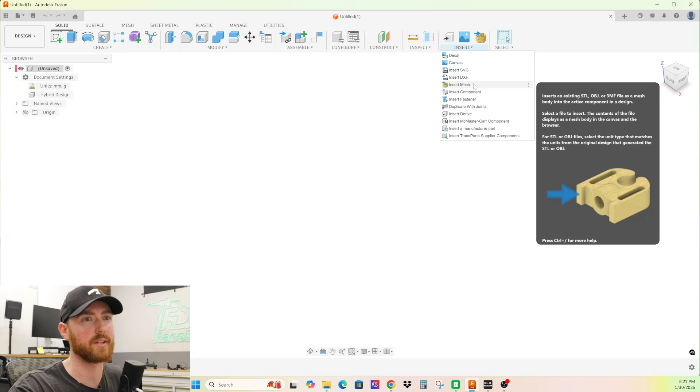The next thing I'm going to do is go to insert mesh. I'm going to find the mesh file in my computer. This particular part is a front steering knuckle. I'm going to convert the mesh body into a component. It's the first thing that I do.

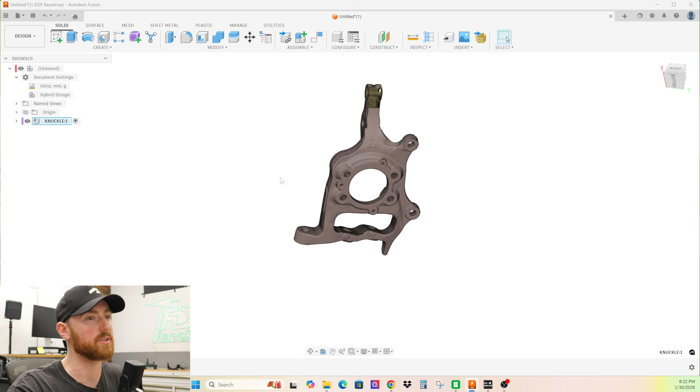From here, I'm going to go within that mesh file, which is now a component, and I'm going to start modeling and working on this from within there. I'll show you why that's relevant later.

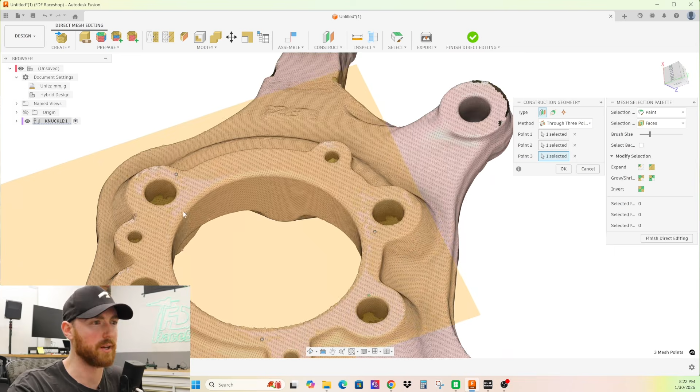The next thing I'm going to do is go to Mesh, Direct Edit, select the body, and use a 3-point plane and pick 3 average points on what I deem to be the flattest surface of the part. You can kind of see how it's crossing over the mesh and how it interferes. From here, I have a plane that is a decent average.

If you're unhappy with it, you can just delete that and try the plane again. We're going to go ahead and use this. Finish direct edit. The next thing I'm going to do is an offset plane.

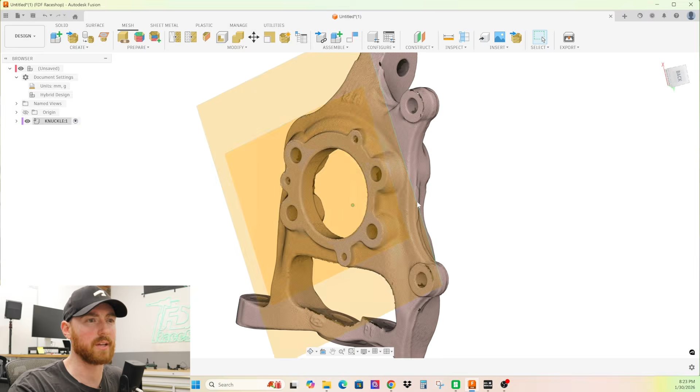We'll set this back 3 millimeters. The reason I'm setting it back 3 millimeters, it's not that critical, but I want it to cross through all of the holes. And I'm just going to hide the first plane that we did so it's not in our way.

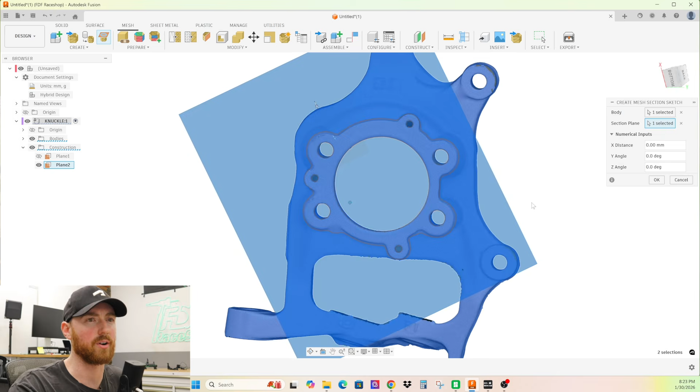I'm then going to do a create mesh section sketch. Select the body, select the plane, and you can see that it's cutting right through all of those holes that we have wanted to capture.

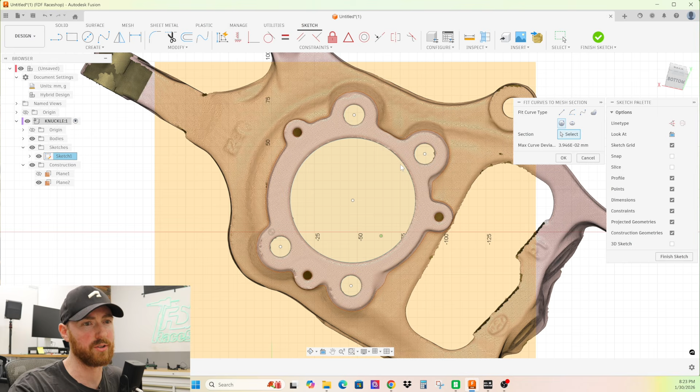The next thing I'm going to do is edit that sketch and then do a fit curve to mesh. This command allows me to fit curves, lines, circles to the section sketch that we did. I'm going to select this circle command because it's going to give me the best average of the circles that I want to use to orient this knuckle.

After I've done that, we can go up in the constraint menu and start making some good decisions on what we should do. We know that these holes are all going to be equal, so I'm going to make these holes equal.

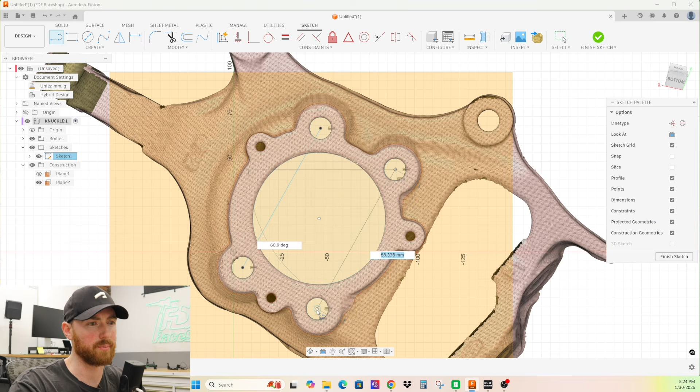The next thing I know is that these, and you can confirm all this by measuring with a caliper or a micrometer if you actually have this knuckle, I'm assuming you do because you would have scanned it. We can use these constraints to our advantage in a way that you actually wouldn't be able to do in a lot of softwares. I can make these circles all the same, plus I can make these lines parallel to each other.

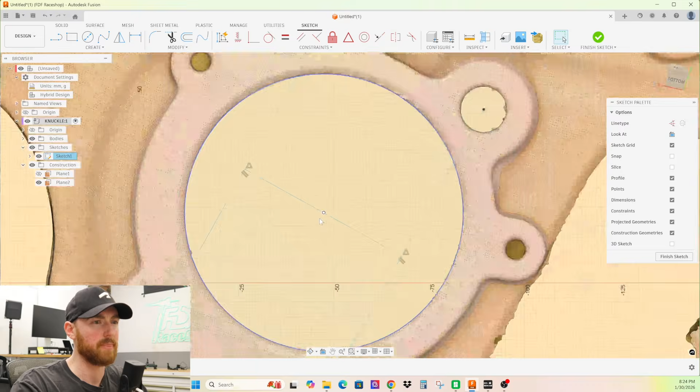I can also do midpoint to midpoint, and then make sure this is very, very slightly off. So if we do want to maintain concentricity with everything, we can simply position that there. Obviously it's going to be ever so slightly off, but mesh section sketches are not absolutely perfect. They're based off the mesh.

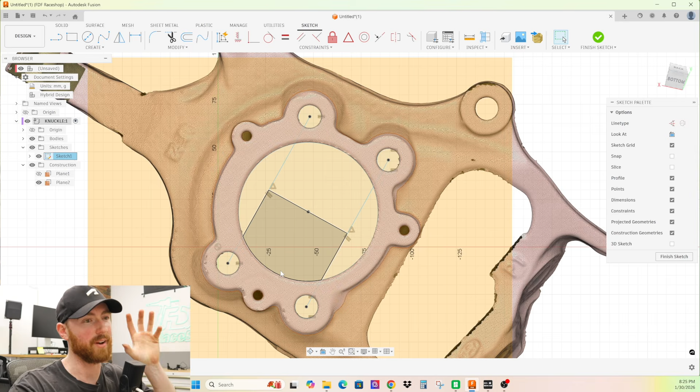So if I do it this way, I know that if I model this knuckle later down the road, these are all going to be parametric.

After I'm satisfied with doing that, as far as the orientation goes, the next thing I would do is simply finish the sketch. Because we drew that sketch within the component, that sketch is now connected to this knuckle.

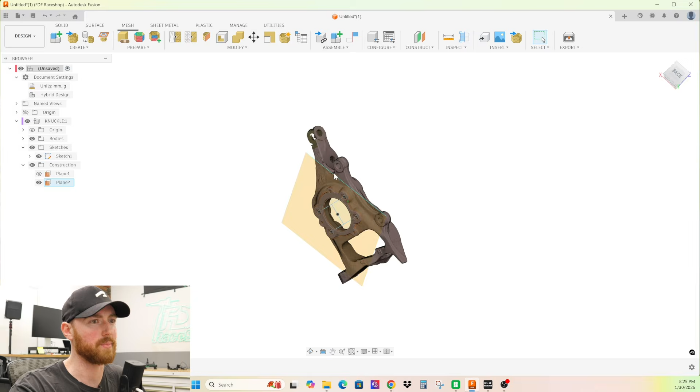So if I go back into this space, and if I unground it, this knuckle is able to be moved, and the sketch is now physically part of this knuckle, which is great for us because we now need to make the origin visible, and we need to get this knuckle over to this origin. Fortunately, using the constraints, we can do that even just based off of the sketch.

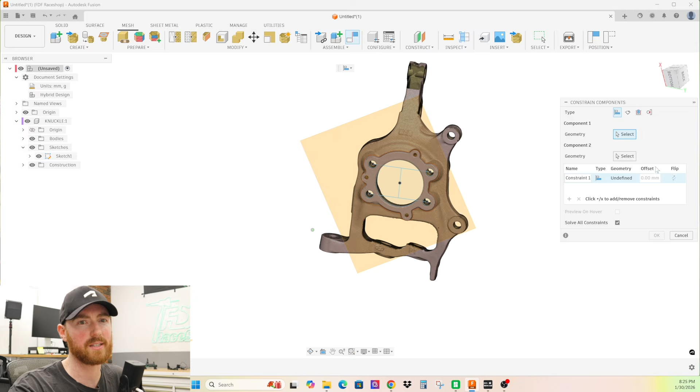So the next thing I'm going to do is very, very simply determine how I want to orient this.

So if I look at my origin, I want my Z going up, I want my X here and my Y there, just like you can see in this corner. And the front of the knuckle here, I want on the front plane. So I can make this plane visible again.

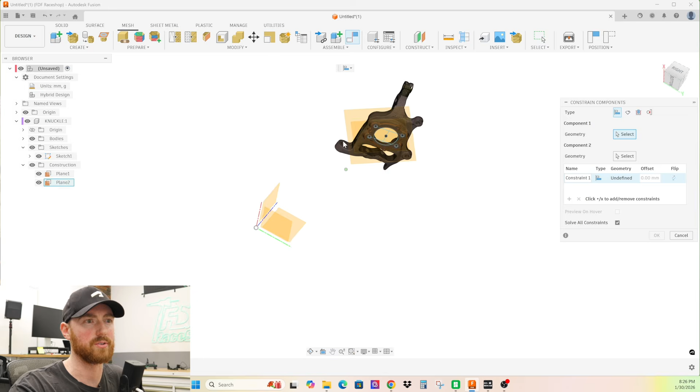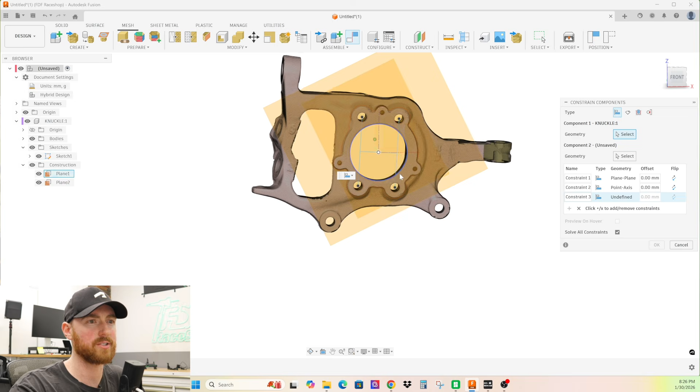I know that's the one I want. I'm going to do a constraint from this plane to this plane. That is backwards, so we can hit this flip command, easy enough. The next thing I'm gonna do is an additional constraint. We'll do the center of our circle on the Y axis. And then our last constraint is gonna be an angular constraint to the X, and I'll just flip that.

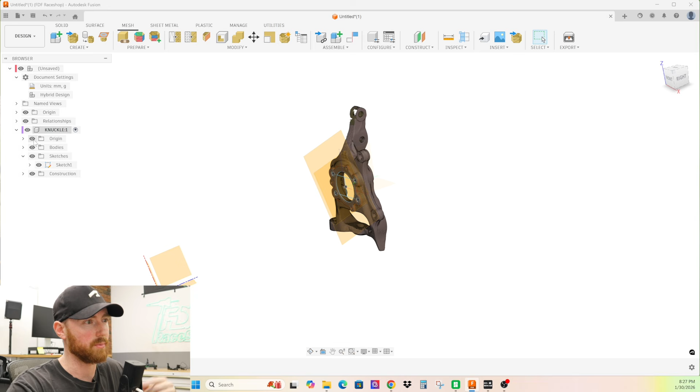And it is as simple as that in regards to getting the knuckle into its origin, but we are definitely not done yet. If we look at the knuckle, because we made a component from the knuckle it has its own origin as well, and that is kind of problematic. You can see where the origin ends up being on the knuckle. Not to worry, we will be cleaning that up later.

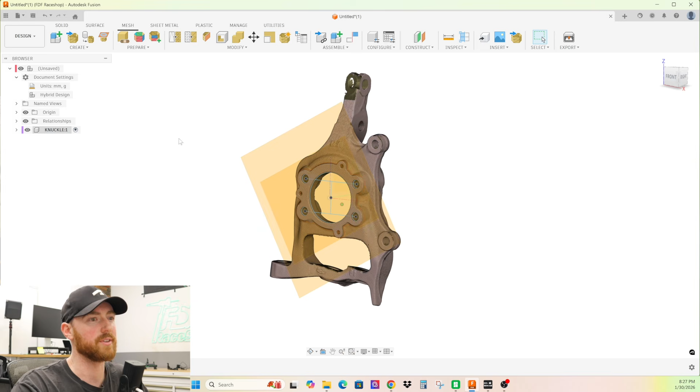I am kind of doing this just as a flow. I don't do this that often, but I do have a very good understanding of the objective. Through multiple different types of approaches, I can always end up in the same result, and you can just follow how I'm doing this and apply it in your own way. There may be a slightly better way to do it, but this has been a really tried and true method, especially when working with different types of files.

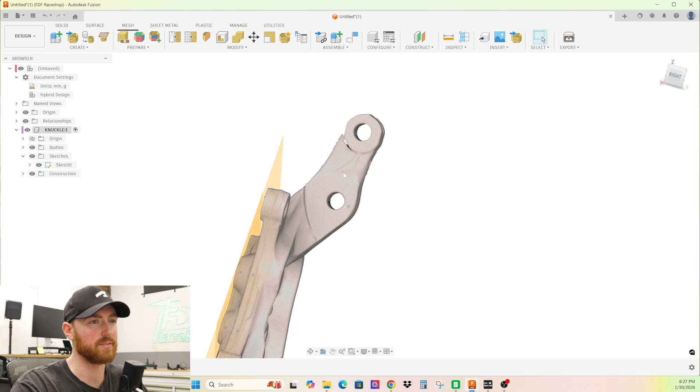The knuckles are not bad, but there are more complex parts out there. The next thing I want to do is capture all the rest of the geometry of this knuckle, but it has to be based off of the very first plane we made. Because if I go ahead and make a 3-point plane here on the side of this, it may be pretty decent, but it will not be perpendicular to this plane. It will not be perfect, that is.

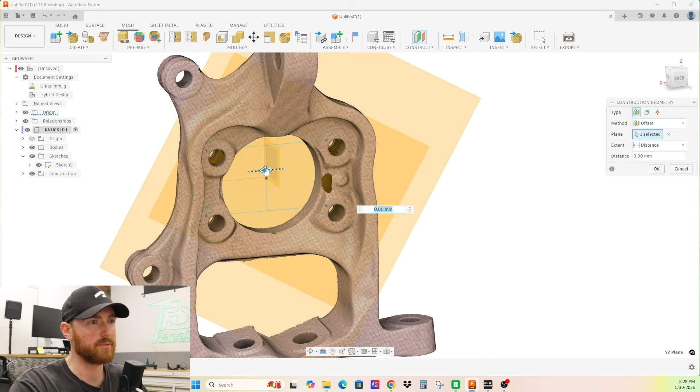So in order to maintain that being perfect, I have to base my mesh section sketches off of the original origin. So the next thing I'm gonna do is create another offset plane, make sure I'm in the knuckle, and I'm gonna make it right off the middle. Let's go over like 10 millimeters, it should cut right through. And I actually wanna stay close to the side just because the scanner doesn't get into the middle of the holes, but it does get on the edges pretty well.

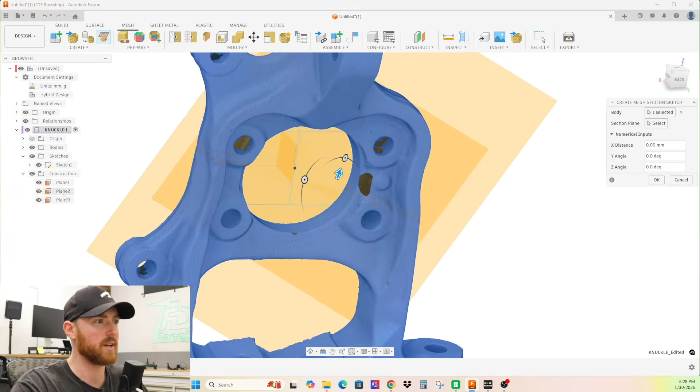So I'm gonna do another mesh section sketch, this mesh, and then the plane I want - it's trying to select other plane, this plane. So you can see how this plane is cutting through the holes that we need to select, and it is exactly perpendicular to the original. So we can do the exact same thing: go into our sketch, edit the sketch, fit curve to mesh, select the circle, and I can now add these circles and do the exact same thing.

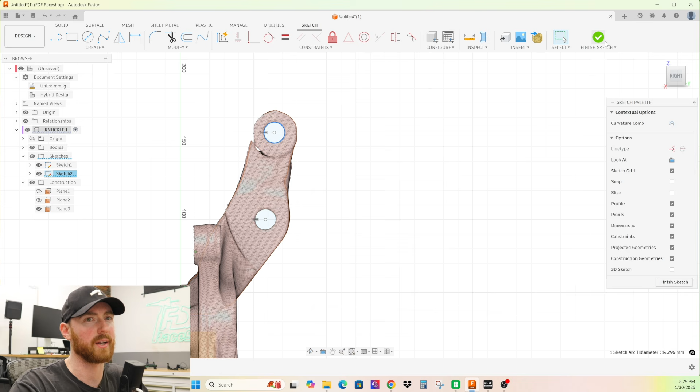We'll make them equal. And if you have your calipers or micrometer on you, you could actually go in here and dimension these. I do know that that's pretty accurate. 14.3 is what I captured, so 14.296 is probably exactly what it is. And we're gonna leave those there for now.

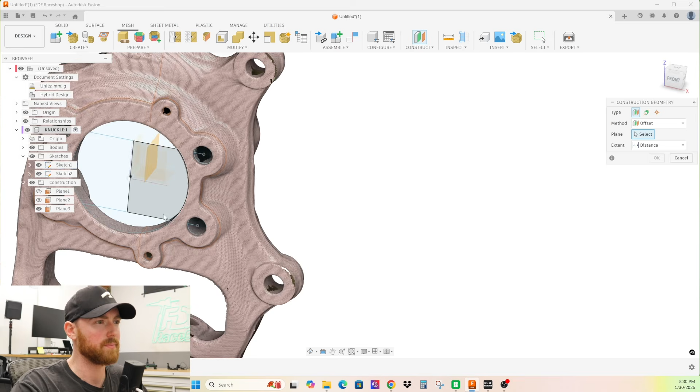So we have these 4 holes, the center bearing, we have the 2 sides. We need to capture the brake calipers. And don't worry about all these planes that we keep adding, it's really not gonna be that big of a deal. So I'm gonna do the same thing, an offset plane from - it doesn't really matter, it could be the face, it could be from whatever, as long as it's the same. And we need to now cut through the brake calipers.

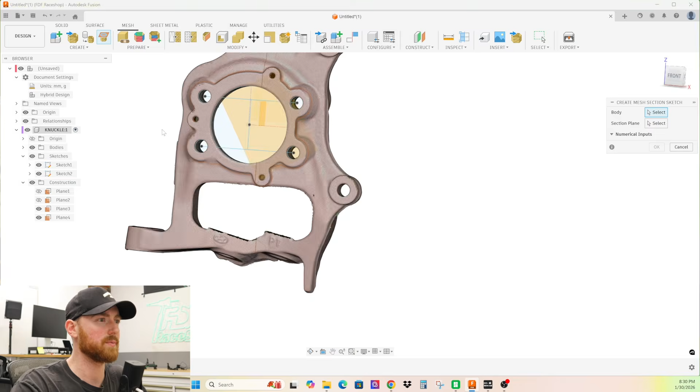It's a little hard to see, but 10 millimeters back should cut through these 2 holes here. We're gonna do the exact same thing: mesh section sketch, select the body, select the plane, and you can see we are cutting through the brake caliper mounts. So I'm going to do the same thing, edit that sketch, fit curve to mesh, circle, select those brake caliper ears. Perfect. And then the next thing I'm going to do is also make those equal as well, because I know that they are.

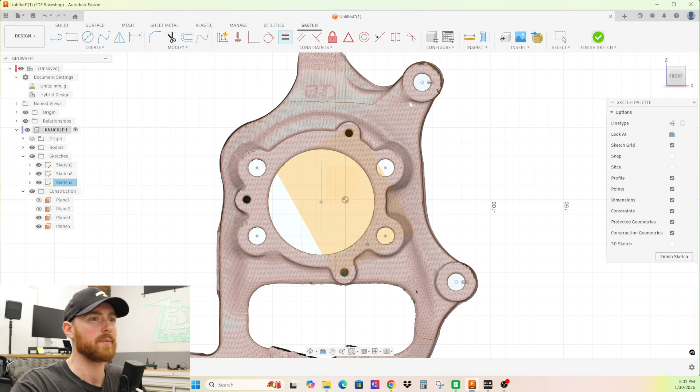Once I've confirmed that, I basically have the majority of the geometry I need, at least the stuff that I know is perpendicular. There are a couple stragglers over here. You can see these, these are all tapered holes, these are cones. To do these, you have to do a couple extra steps if you want to do them correctly.

And one little trick of the trade in terms of capturing these well, so that you can actually engineer and design a taper that's going to fit this really close or perfect. You can do this manually, but you can also do it with the mesh file and get really close.

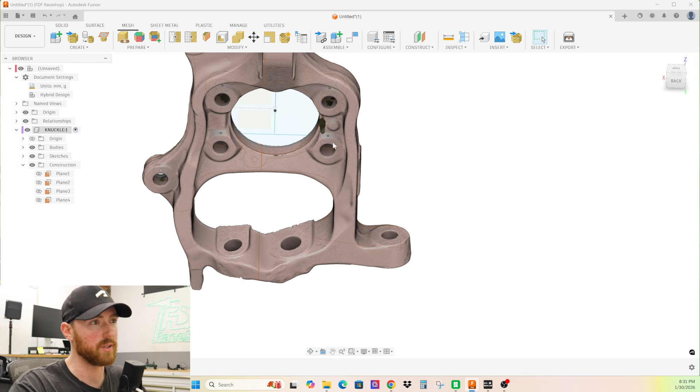So I'm going to do a mesh, direct edit mesh, select this, then I'm going to do a 3-point plane on the flattest part I can find. And the bottom of this knuckle I know is definitely a machined face.

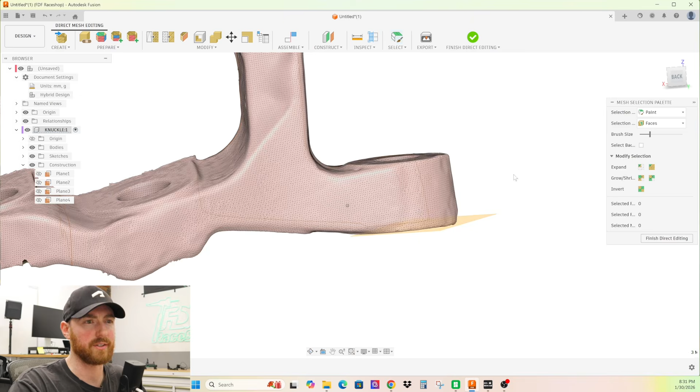Finish that. I'm now going to simply create a sketch on the bottom of this, and I will do my very best to fit the circle to this.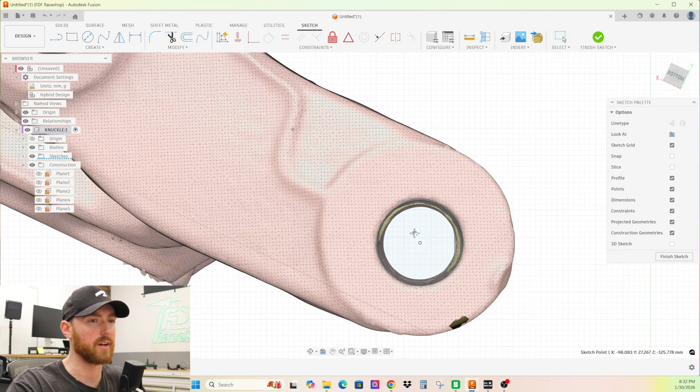Now this is always going to be the part where there is margin for error, but when it comes to tapered ball joints, there's really only a couple things that you need to capture, and the angle is the most important. You can always reduce or increase the taper to get a different depth. So what we are trying to capture here as close as possible is the taper angle, and this is going to do a very good job at that.

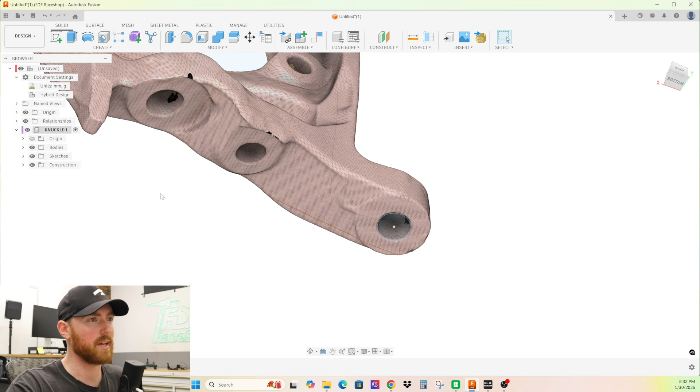So we have a circle, a sketch that's in place. The next step is a little rudimentary, but it is going to work well. We're actually going to create a new component.

And the reason we're creating a new component is because we can make its origin visible, and then we can actually joint its origin right to that sketch circle. And the reason why this is going to be so handy is because we can now go into this component.

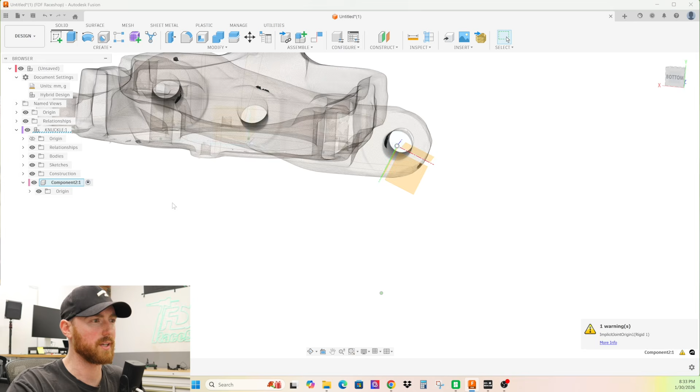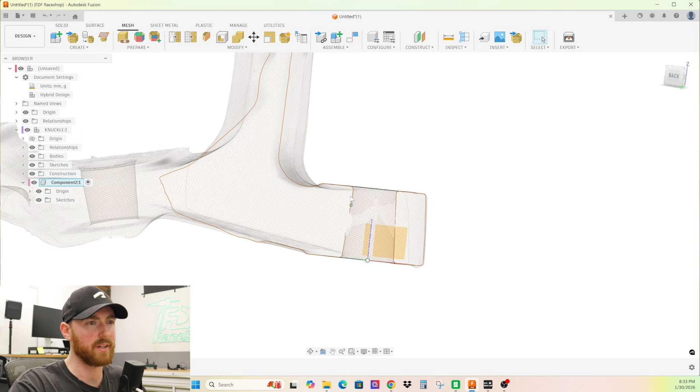I can create a mesh section sketch off of the plane, so basically do the same process that we've been doing. And it's going to give us a slice right through this taper. So this body, this plane—you can see it highlighting itself there very clearly—the taper right through the middle of this, and it's going to give us a good result.

So I'll show you how I'll work with this. We'll go into here, we will edit this sketch, we will fit curves to mesh section, but in this case I'm not going to use the circle, I will use the straight line. So we're going to go from this point to this point.

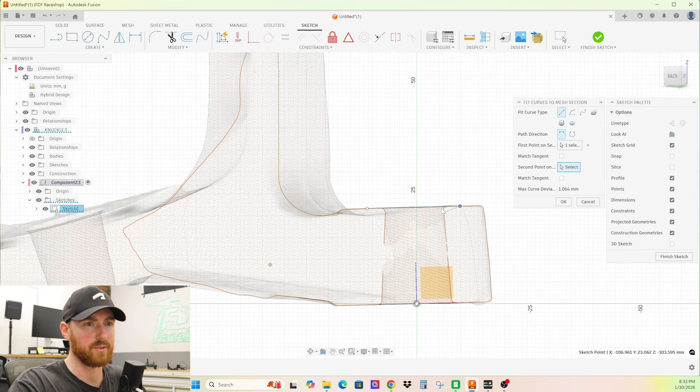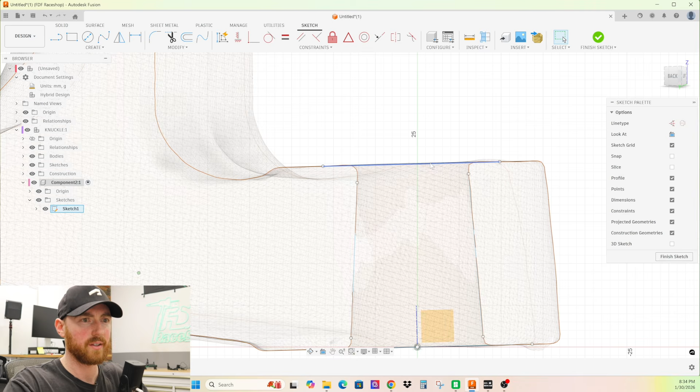We'll do another line down here, repeat that command. We want to get the best average of this taper. Repeat that, we want to get another line here, and we're basically choosing faraway points at the greatest average of the line. And from here we have a good top line and bottom line referencing our section sketch.

So these are going to be really very close. And from here I'm going to do an extend, and we'll do a trim. I typically don't use these commands other than in this case.

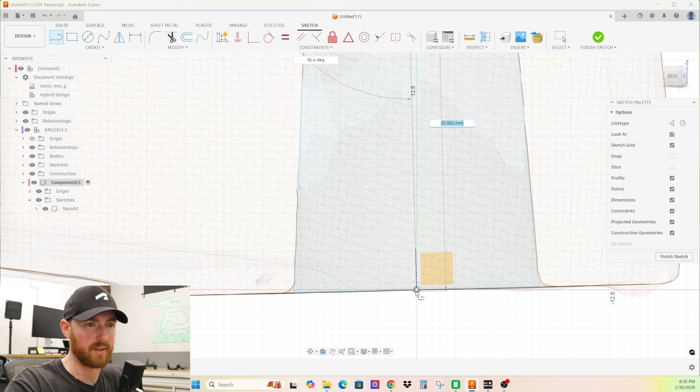So we have given ourselves a pretty decent cone here. So all we need to do is make a center point line from the middle of this line to the middle of this line. We're not going to use any constraints here because we're only using half of this cone.

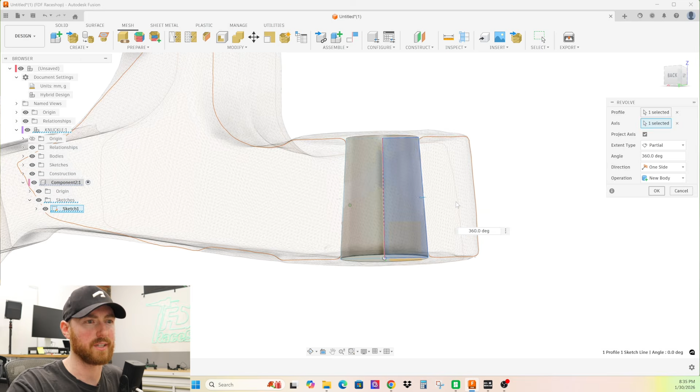We're going to do a revolve, so I just hit Shift R there—that is my quick command for a revolve. I'm going to select the profile and the axis, and that is going to give me what that cone really looks like as if it was a body.

And from here we can use this body to do all kinds of different things down the road, but for now I just want it to be part of this knuckle—I want it to be all one. So the next thing I'm going to do is go back into the knuckle.

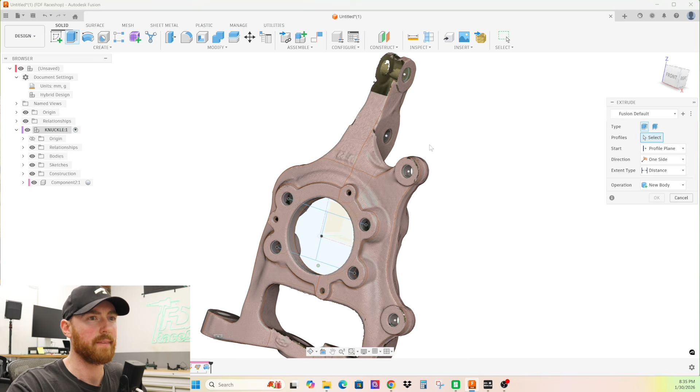I'm now going to make bodies from all of these sketches, and this part is kind of redundant. It does require you to measure the knuckle and then determine what these values should really be. There would be a way I could do, like I said, a 3-point plane, and I could extrude it to that plane, but that plane may not be perpendicular to the original origin.

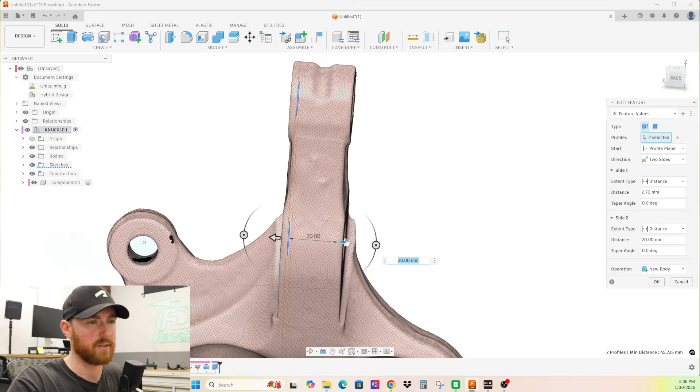I want to do the two sides so we can get this going. These can also always be trimmed later. We are really trying to just get the critical dimensions of this knuckle and of the circles that we're going to need to be using.

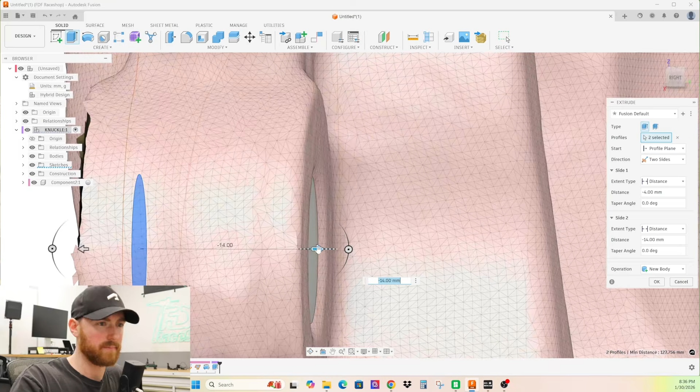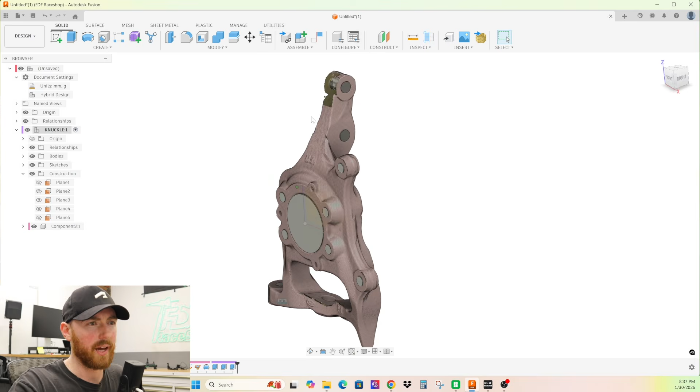So from here I'm going to do those, and then we're going to do the same thing here. This one is nice because we can just go to the original construction plane that we did. We will do two sides, and the back side doesn't really matter. There you have a decent idea. I'm not going to do these because they're redundant.

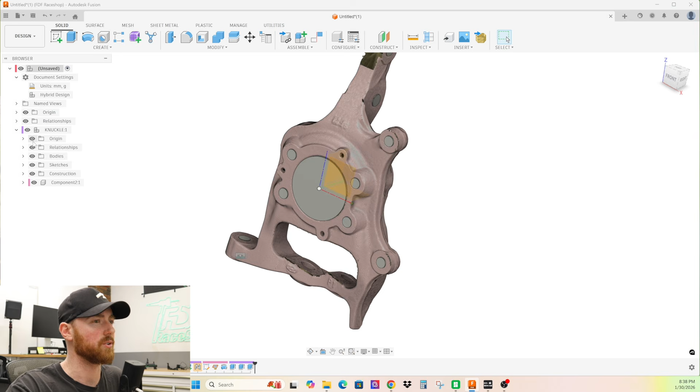They're essentially the exact same as what I did there. So from here, what do we really have? We have a component that's constrained to the origin, but it's quite a messy timeline. It's quite a messy part because our origin of the part is actually still over here, and then the origin of our assembly is correct.

So I really don't want to use this. I don't want to save it. I don't want to use it. So the next thing I'm going to be doing is quite interesting, and I only really figured it out by necessity. I really wanted to clean these things up.

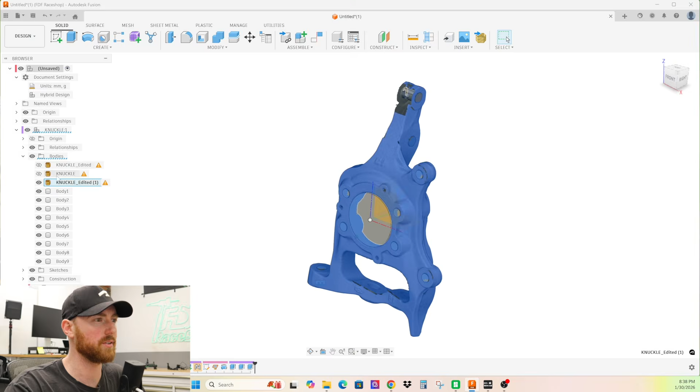So what I'm going to do is, these are just from the mesh sections and copies, so we actually don't need them at all. The fact that there's 3 of them is not a big deal. The one that's visible, I'm going to move up to the main level. So you can see that we just turned the component back into the body, which is cool. I just found that out by accident.

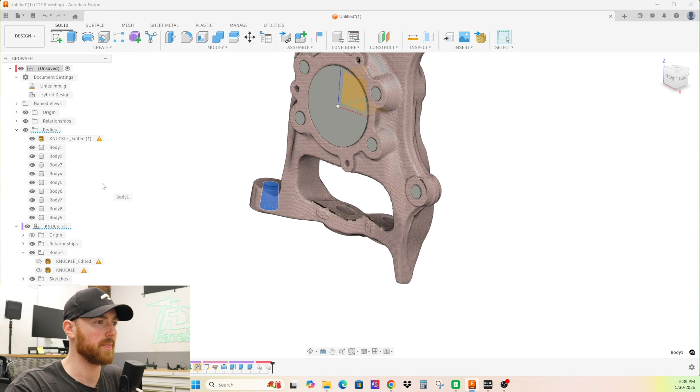And then the bodies, going to do the same thing, bring it up to the top level. We're going to do the exact same thing with that one component we created, which is this pesky little guy here, and we're going to move that up to the top level as well. So when we close all of these, we actually now have all of these bodies back on the top level. And these components here are now essentially worthless.

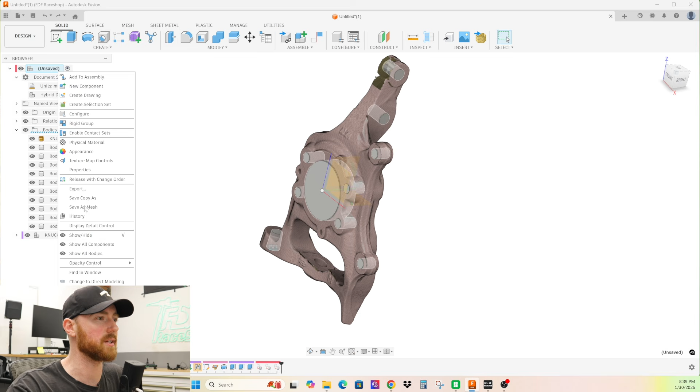Now, you would think you could just delete it, but if you look at what happens, it deletes the mesh and it gives you an error. So we don't want that, but we do want a clean assembly. So what I'm going to do is change to direct modeling, and then I'm going to delete that because there really wasn't anything in them. They were just connected through the timeline.

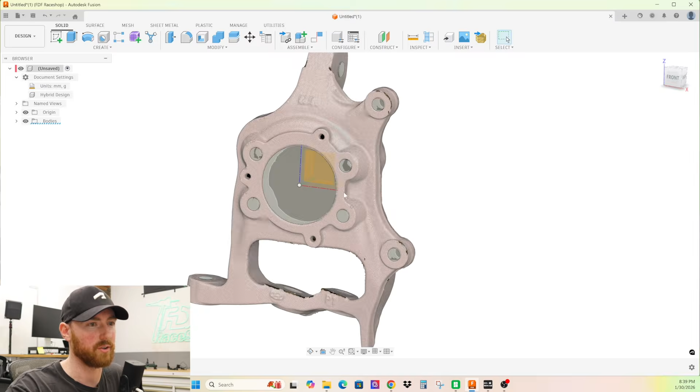Now I can go back to parametric modeling, and you can see we have a perfectly oriented part, clean mesh, good bodies locating all of our critical dimensions. The taper, the bodies, everything is great. From here, we can hide this origin. I could save this part as the knuckle that I need.

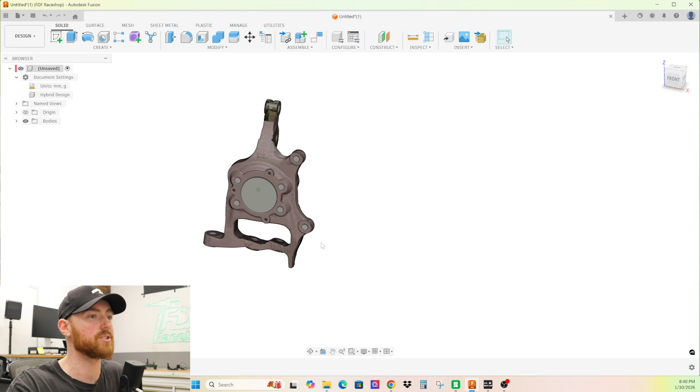And I'm going to show you guys one more trick. This essentially would be a left front knuckle, but what if you need a right? You don't want to go and scan another one just to get the exact same result. You want to be able to model this and just mirror it. So we're going to do something a little redundant, but it's good practice.

Create component from body, a complete reverse of what we just did. I'm going to put all these bodies back into this component. Now look at this. We have a component outside of the assembly that has a good origin, and we are now able to mirror components.

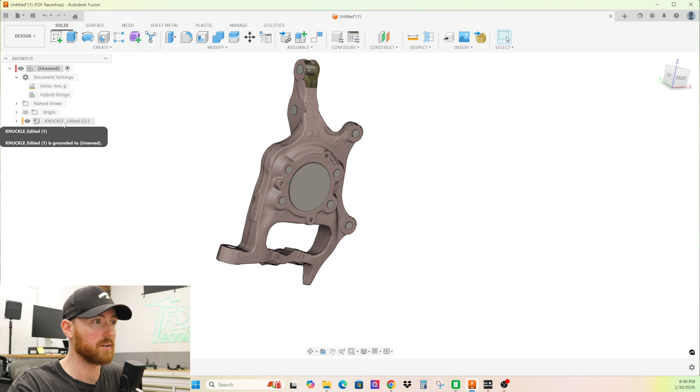So we can click on this, go to the mirror command, click mirror components, objects selected, mirror plane, this one, and we have successfully mirrored all the bodies and the mesh file, giving us a left and right knuckle.

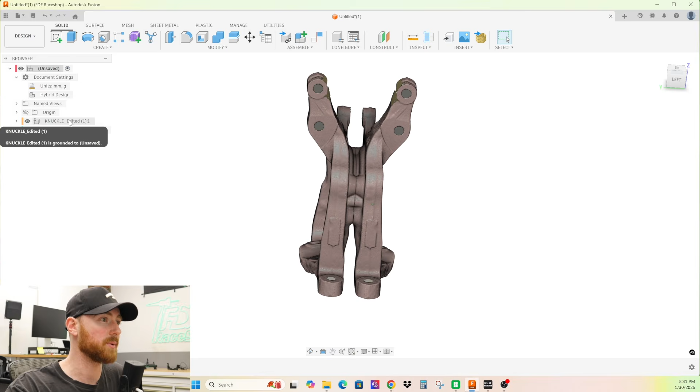And from here, it's the same problem. You can't delete this because that is the originating body that we mirrored from. So it is referenced, but we can do change to direct modeling, delete this from the design space, and go back to parametric modeling. And here we have the opposite knuckle perfectly mirrored.

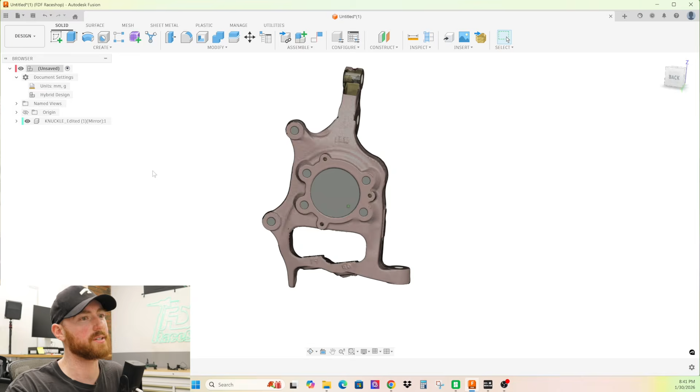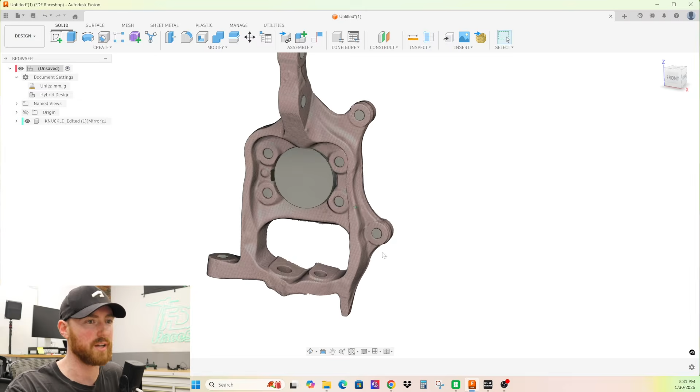And we can just do a save as left and a save as right. That is how I work with these mesh files, and that is how I use them in large assemblies that require a ton of constraints. And we do all kinds of suspension simulations using components just like this. These bodies are great for joint constraints, for joining ball joints, and having these mesh files work within Fusion is really, really nice.

And it's only gotten better over the years. I've been doing this for a long time. If you don't have any post-processing software for doing mesh files, this is definitely the best way, and it will get you extremely close.